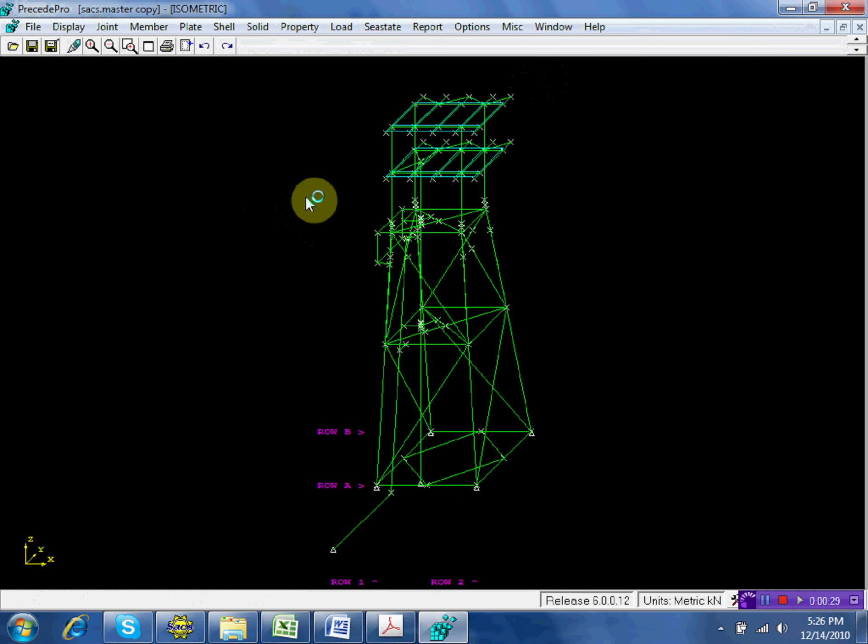So we will select. Go to display, go to select. Check disconnected joint, and check plates, and include in conductor only. We will show conductor only.

So we will add some additional loading. Press OK. So this is now the conductor. We will add a uniform load along its length.

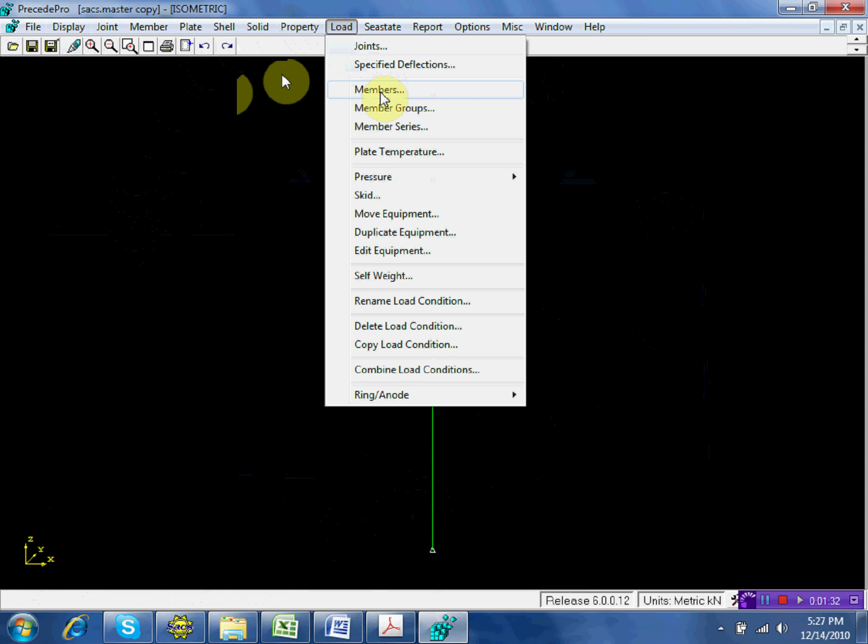Go to load, go to load, and members. Select this. Press Ctrl for a multiple selection. Select all for a multiple selection. Press apply.

This is part of jacket load miscellaneous, so scroll down and go to JCK. Conductor, go to load and then member. JCK, press OK, and then your load ID is grout.

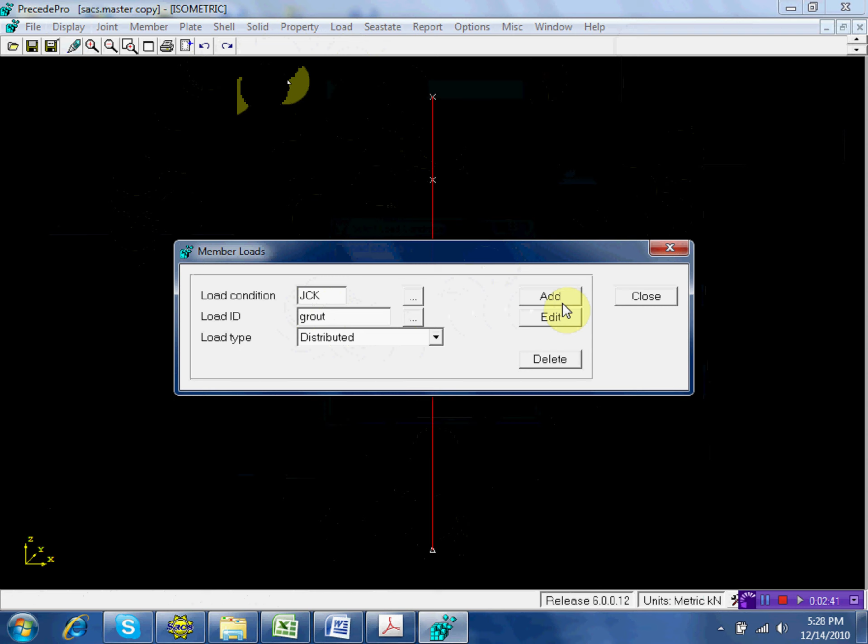Grouting or tubing, grout. Just put grout. JCK grout. Press add. And then my loading will be minus 10, assuming 10 kilonewton per meter.

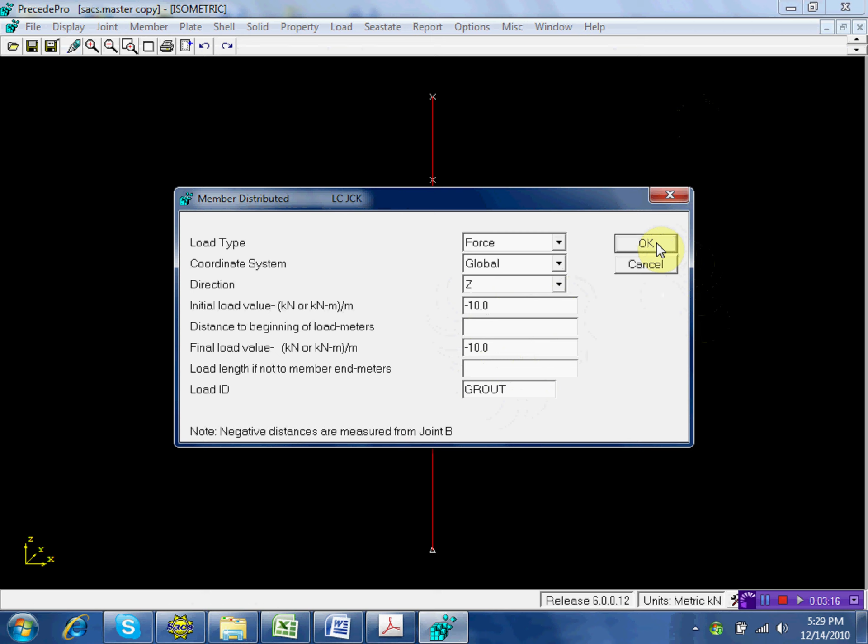So 1 ton, grout, and then 1 ton, almost 1 ton, more than 1 ton. So this is made up of grout plus the tubing. Press OK and it will look like this: uniform load downward. So you have 705 kilonewtons.

Save, press save. And then we will perform super element again, because we updated the loadings. Close the precede.

Yes, you should pay attention: distributed load, member load.

You have already the PSI run file, this one. You just double click this one, and it will go like this, same as yesterday. If we go to files, double click this, the PSI run. If you have the PSI run, double click, and it will look like this.

If you don't have it, you have to go to linear static with PSI and then run the analysis, select the member SACS model file and then the PSI file. If you have it, just double click the run file, and it will automatically go to the file.

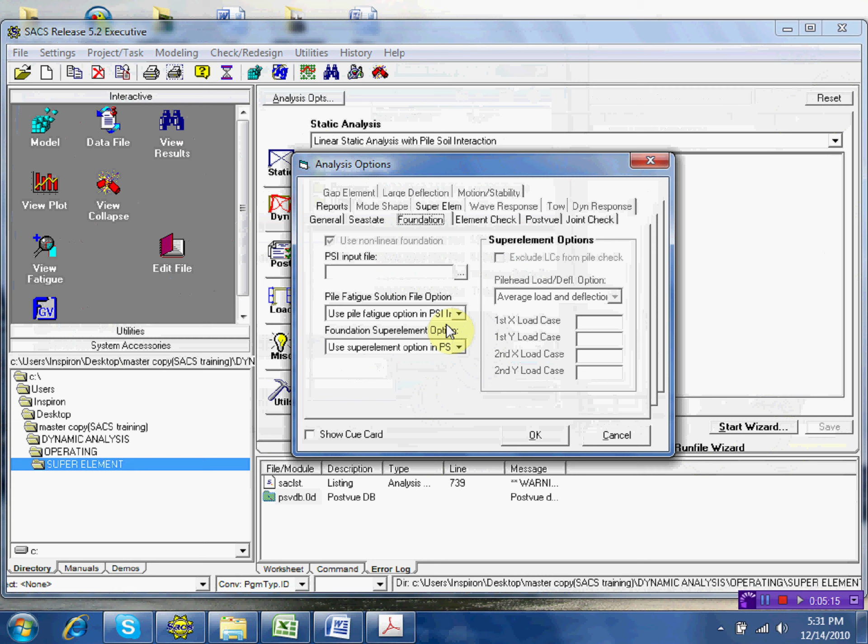Now, I don't need neutral picture files. I will keep this file, PCISI, keep this file. Right click, and then keep this file.

Now this is dynsef. Take note, we are at operating case. So right click this one and rename. I will rename this one as Oper, meaning operating case. Rename, right click, and then rename.

So run the analysis to extract or to get the dynamic super element. Now this one, dynsef, we need this one to perform modal analysis. Run.

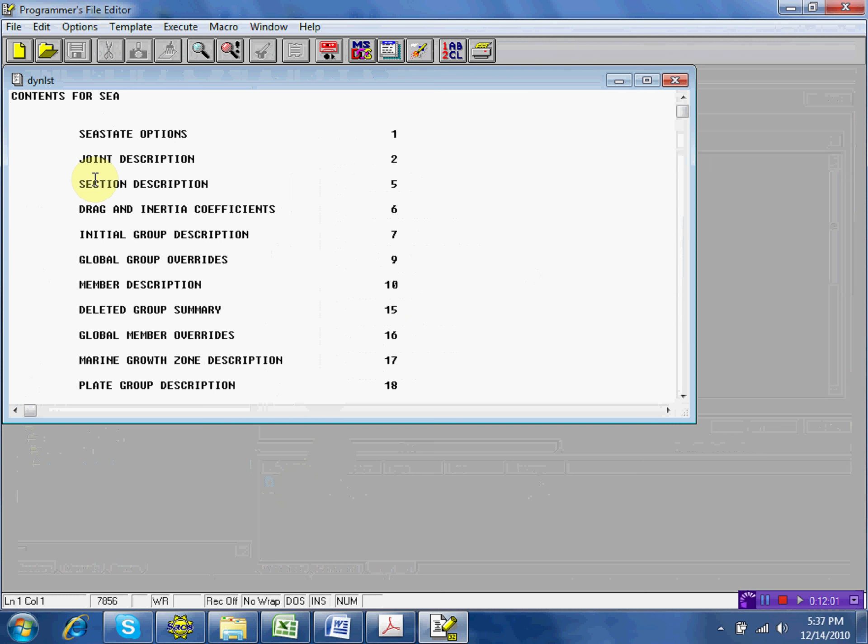Okay, I already sent to you the file, the file on how to compute dynamic amplification factor. Can you open it? Open this file. Open that file.

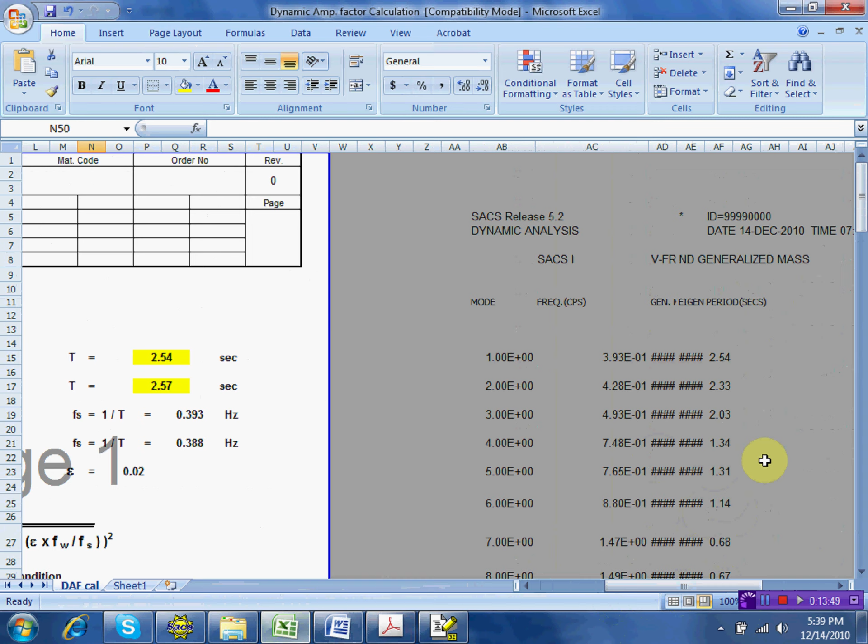Okay? Got already the file? Yes. Now, from here, this is operating, operating condition. So I will copy this. Copy, until here, until the 20th mode. Up to 20, up to 20 only.

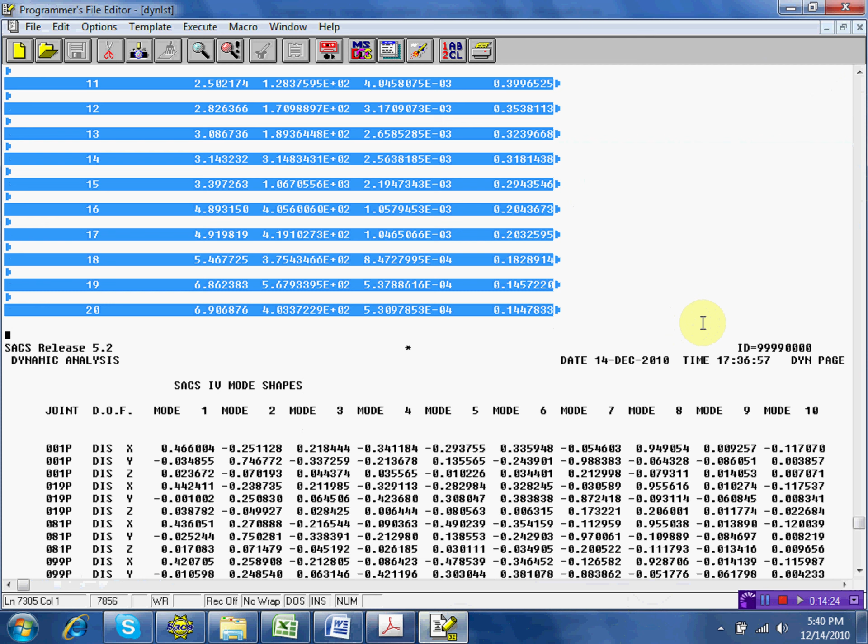Right click, copy, and go to this folder, this file, the computation. Okay, on the right side, put the cursor here, right click, and paste. So it will look like this.

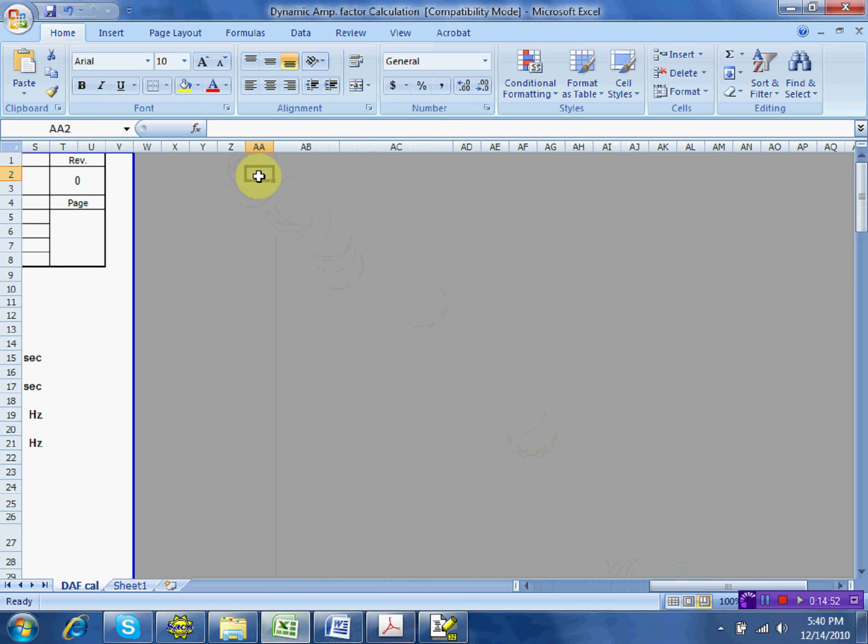Do not do anything yet. Okay? So you are already at this stage? Yes.

Go to data, and in the text to columns, select data, text to columns. So you will see this one.

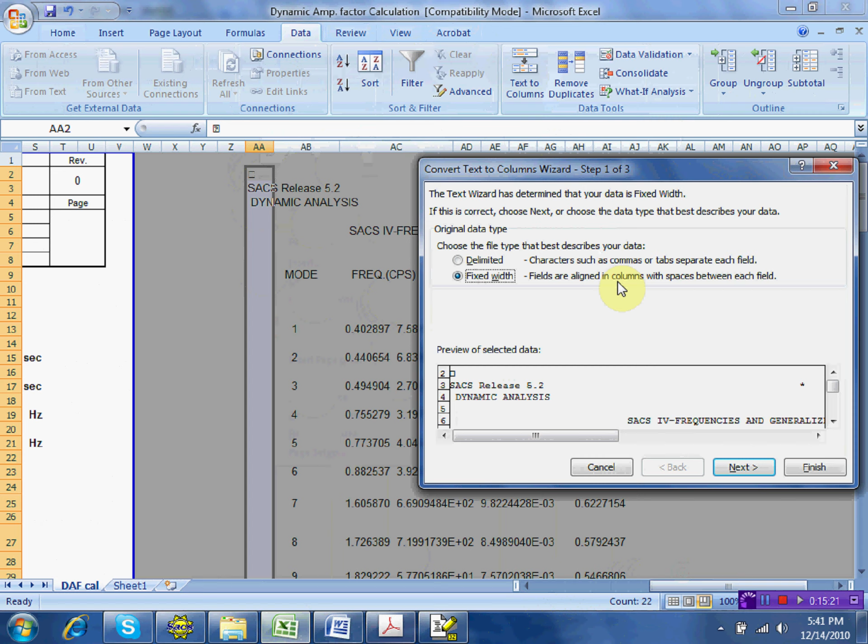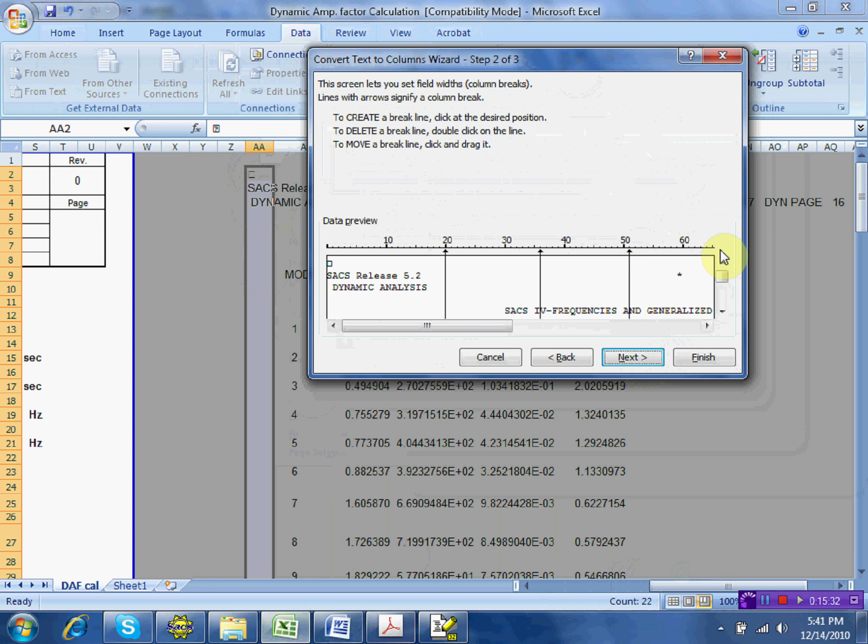Next, we need only the natural period at the first mode. Next, press next, next, and then finish. Oop. Undo. This is 2.48, 2.48.

Okay, so we have here the DAF calculation for in-place natural period of structure, operating, right? This is operating. Select only the first mode. So, equal to, on the first mode, how much? 2.48. So I have already 2.48. On the first mode, operating natural period is 2.48. So this is automatically calculated.

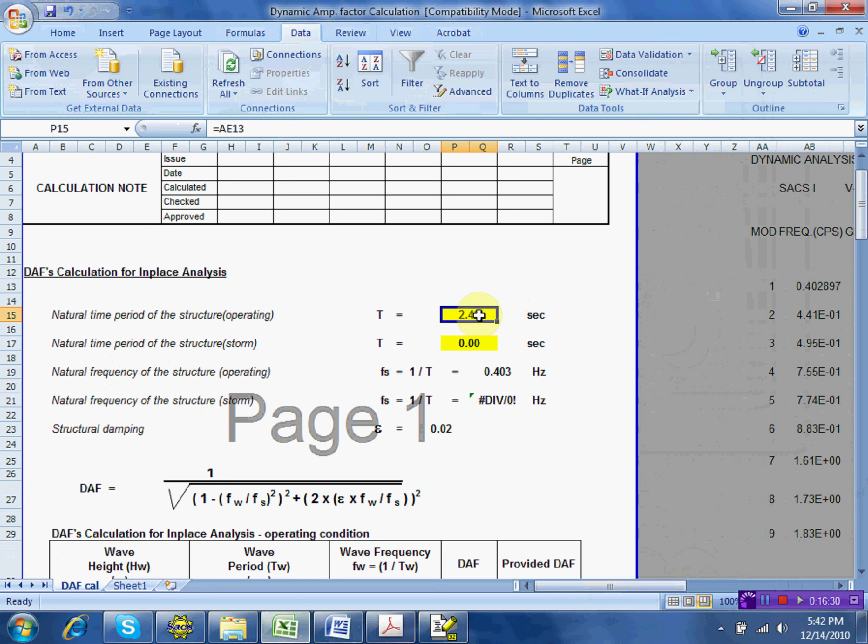So, in this, okay, we will discuss this wave height. The wave height is taken from wave period and height, operating, see? This is design basis. You see, wave height 2.4, wave period 5.7, right? Design basis. So that's why I put 2.4 and 5.7.

So this is from design basis: 5.7 T wave, 2.4 wave height, and then the DAF is 1.23. So from this equation, I've got 1.23 dynamic amplification factor. So we will use this DAF in-place analysis. So write this down, I will write down DAF in operating, 1.23. Okay, so this is the formula already calculated using this formula, DAF. This is what we call single degree of freedom DAF calculation.

Okay, what's next? Done with operating. The next one is storm condition. So, same procedure as what we did in operating. The difference only is your load case set, in the load case set. So we have already performed operating, so the dynamic amplification factor is 1.23.

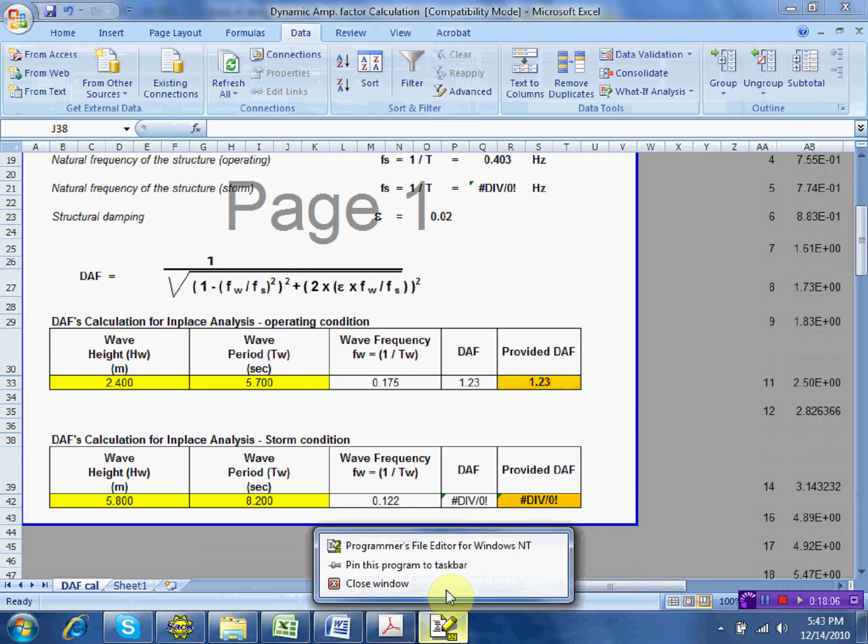We will perform now dynamic amplification factor calculation in storm condition. So, what we need is the natural period at storm condition. So, we'll calculate. Save that file. Save. Okay.

Okay, so we have already the DAF at operating condition. So, 2.48 natural period of structure. Now, we will go to extreme case.

Go to extreme case. So, we will make another folder, same as what we did in operating case. Okay? So, make another folders. In this case, I put all my files in master copy. So, in dynamic analysis, we will make another folder. In here, this is part of dynamic analysis now. So, I will make another folder. I will call this folder as extreme. Extreme, extreme case.

Okay? Extreme case. What is in the operating case, the input? Just copy it across in the extreme case. Okay? So, operating, I will make another super element. Then I will make also modal analysis. No? So this is under dynamic analysis.

So super element is to linearize the non-linear foundation. No? So you have to perform this one to linearize the foundation. Okay? So in this extreme case, I will make another folder. I will name this as super element creation, or super element. No?

Super element. I will copy across the file from operating to extreme. So super element, I will copy this, and of course the PSI. We have already this one. Copy the SACS model file and the PSI, and then the PSI.

Under dynamic, you check this as super element input in modal analysis. So in this case, super element creation, so this is okay now. But I have to hide 1,000 case. 1,000 case is operating, right? 1,000, 2,000, 3,000, 4,000 are extreme. So I will hide 1,000 now.

And I will unhide 3,000. You are not wondering why I didn't choose 2,000 instead of 1,000. Now take note, 1,000 and 2,000 series are operating. 3,000 and 4,000 series are extreme. So in this case, we are at extreme, so that's why I put 3,000.

The question, why didn't I use maximum water depth instead of minimum? Because natural period is usually a function of base shear. Base shear maximum will occur at minimum water depth. So always use the minimum water depth. That's why series 3000 is minimum water depth, that's why I select 3000.

So it's okay now, you look at it with extreme condition. So minimum water depth is 3000, 1, 2, 3, 4, 5, and so on and so forth. Save this file.

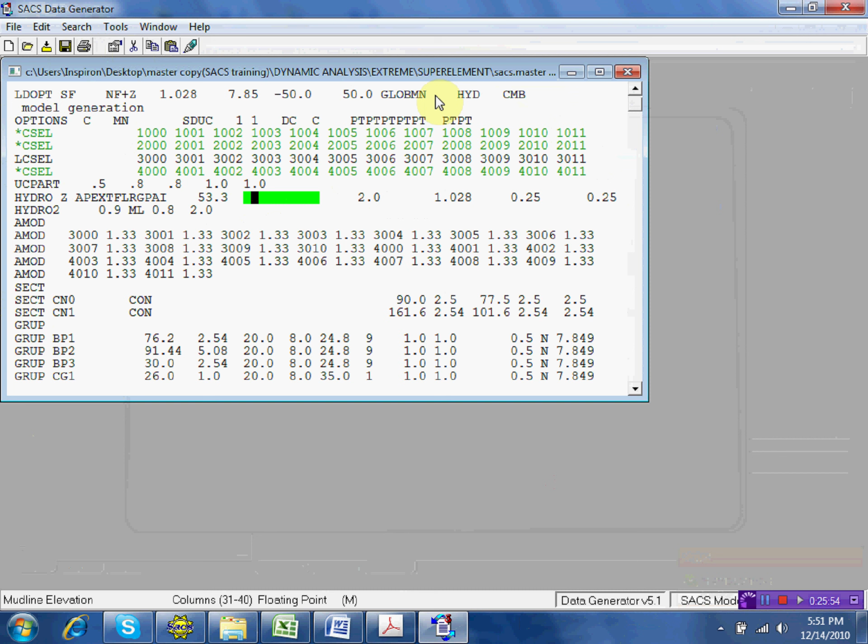And then run the wizard. So run the wizard with PSI. So this is under extract mode, so you have to reset and go to static analysis with PSI. Static analysis with PSI, okay, so start wizard.

Now the file name is SACS-INP, but we didn't name it as SACS-INP, so you go scroll down. Select all files, so that's SACS master copy. If your name is SACS-INP, automatically it will pop up, but since our file name is master copy, then it will not pop up. So you have to select all files. Okay, select this, open, and select the PSI input file. Okay, select this.

Okay, so you have the model files and the PSI file. Press OK. Now, in the PSI input file, we will update this one. We will modify this one because the original loading is operating, so I will change this one.

Go to data file in the PSI input. We have already performed the PSI input, with consideration of the scour effect, so degraded soil. In the file super element, you select the load in the model file. Can you still remember that file? 3000 series, right? So I will change from 1000.

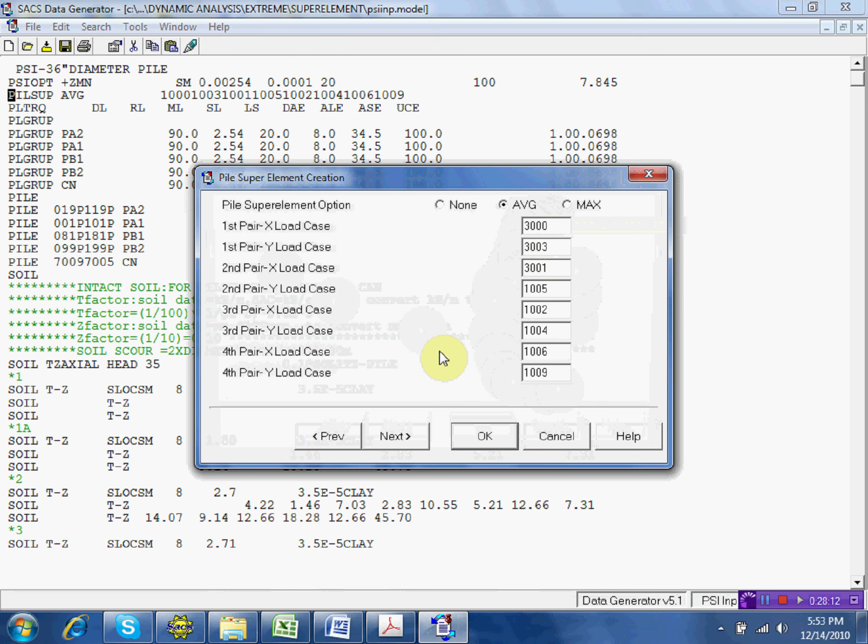I will just make this 3000. 3003, 3001. But take note, we have this like this, huh? The angle of attack should be X and then perpendicular. X perpendicular, X perpendicular. So 1000 as to 1003, see? 3000 as to 3003, 3001 as to 3005, and that side. So just change this to 3000, 3000, 3000, 3000, 3000.

First pair X load, 0. The first Y load should be 90 degrees to that. So if I will attack here on the diagonal, it should be perpendicular. The first Y. So usually very important is 0, 90. Base shear, base shear. So 0, 90, 180, but you will include also some part diagonal to the jacket structure. Okay?

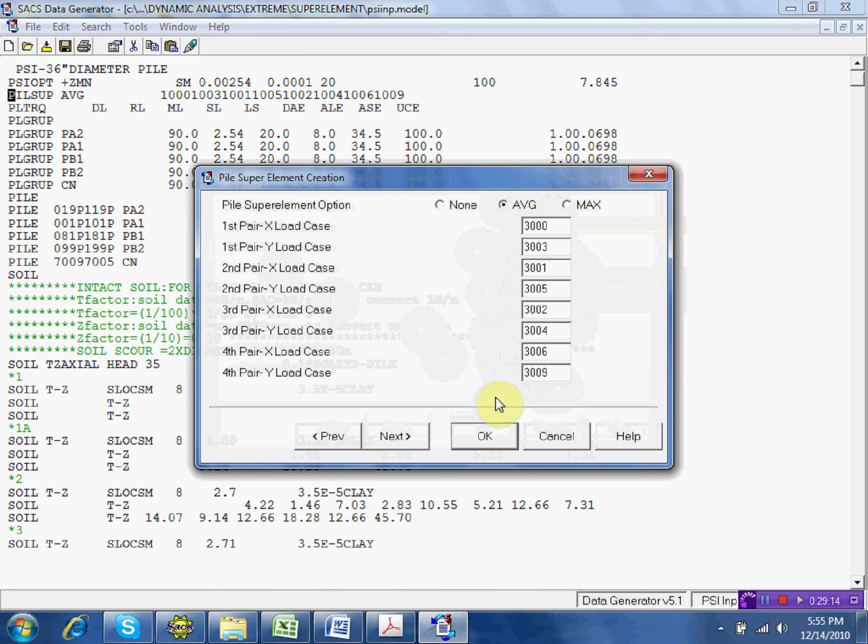Press OK now, and run the analysis. Run the analysis. So save the file. I will rename this as dynamic super element. Right click this and put rename.

Put extreme. Extreme, extreme. Super element at extreme case. First is operating, the second is extreme. Now, I don't need neutral picture file. We don't need this one, right? We need only extreme, so I will hide this one. So hide this file.

Keep this file. Right click and then hide this file. This is to avoid too many files. Those unwanted, you don't need to show. Okay? So extreme case, DYNSEF super element is required to linearize foundation in order for you to perform dynamic or modal analysis. Run the...

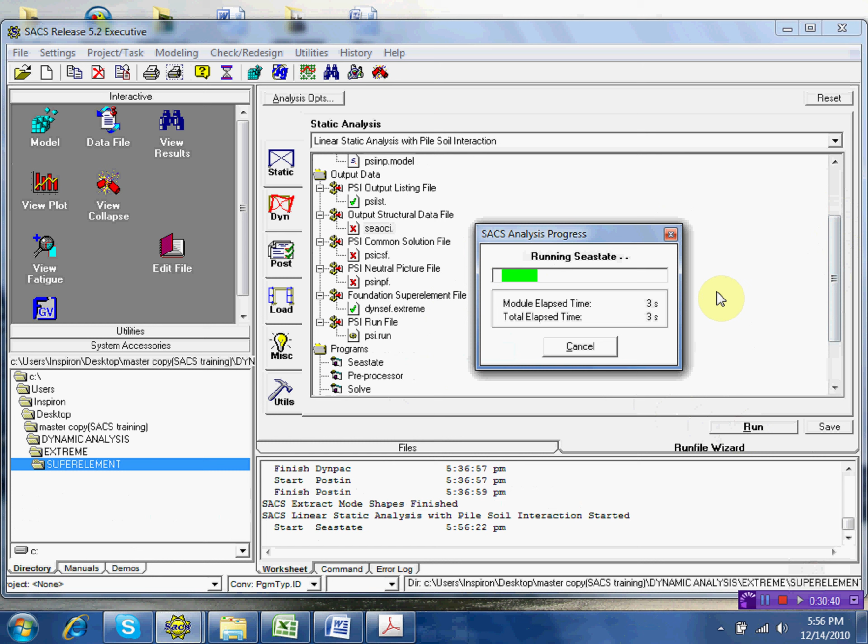Okay, so check. No errors found, so the file is not corrupt. So this is okay. Next will be the modal analysis. After the creation of the super element, you can perform now modal analysis. So this is very important. This is to remind you. We have already this. Thank you.

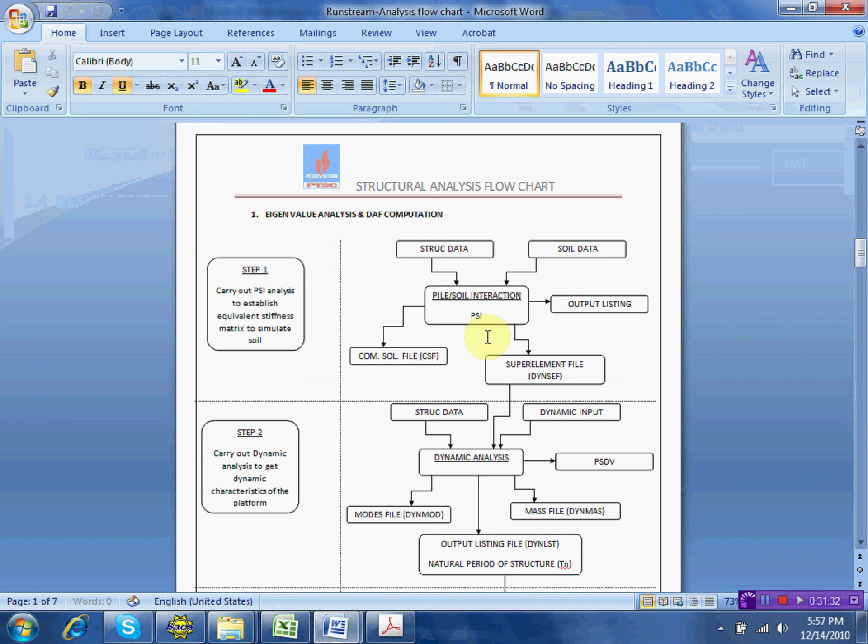Run stream. Yeah, I already sent this file to you. In order for you to not forget, you have to use this one. See? Eigen value analysis and DAF computation. The first step is this. Remember this first step? We have structural data, we have soil data, we perform PSI, and then now we have the super element, right? DYNSEF. After the DYNSEF creation, perform dynamic analysis, modal.

So structural data still needed, dynamic input is needed, so we have already put this one. And DYNSEF is an input in dynamic analysis. So you need super element in order for you to perform dynamic analysis. Same procedure as what we did in operating case. Okay, so I will perform now analysis. Go to modal, under extreme, go to modal analysis.

Okay, this one. Take note, you have to add. So you notice, you have to add a joint. You have to modify a joint. You put 22200 DOF at main jacket nodes. So this one, 222, 22200, 22200.

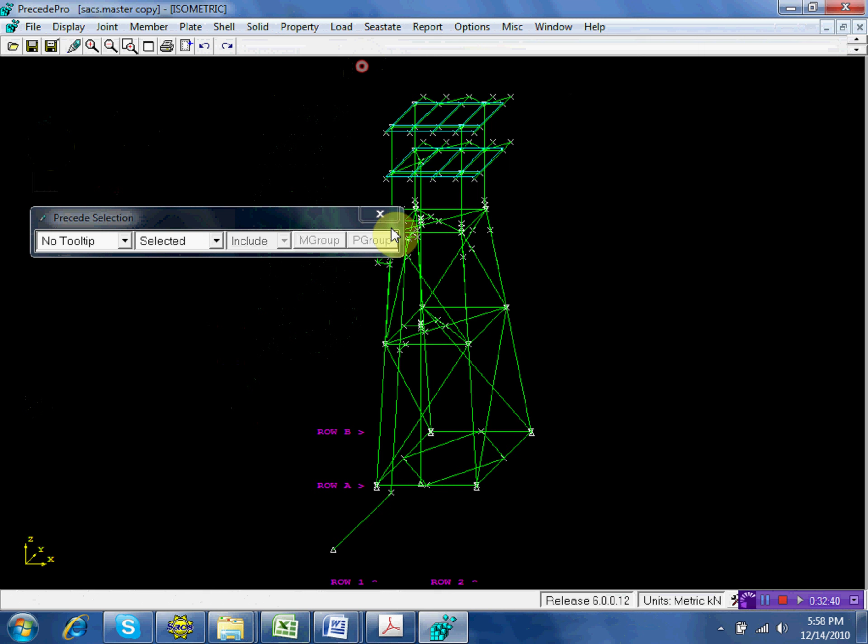In here, the retained degrees of freedom, usually at the jacket main legs and top side. So you notice I put top side here, top side, top side, top side. Another on the top side, top side, top side. So that's the only modification from the in-place analysis.

So you have to select the input. So all files. Copy, open, and then Dynpac input. Are you following? Okay, all files. So Dynpac input files. Open. But do not run the analysis yet.

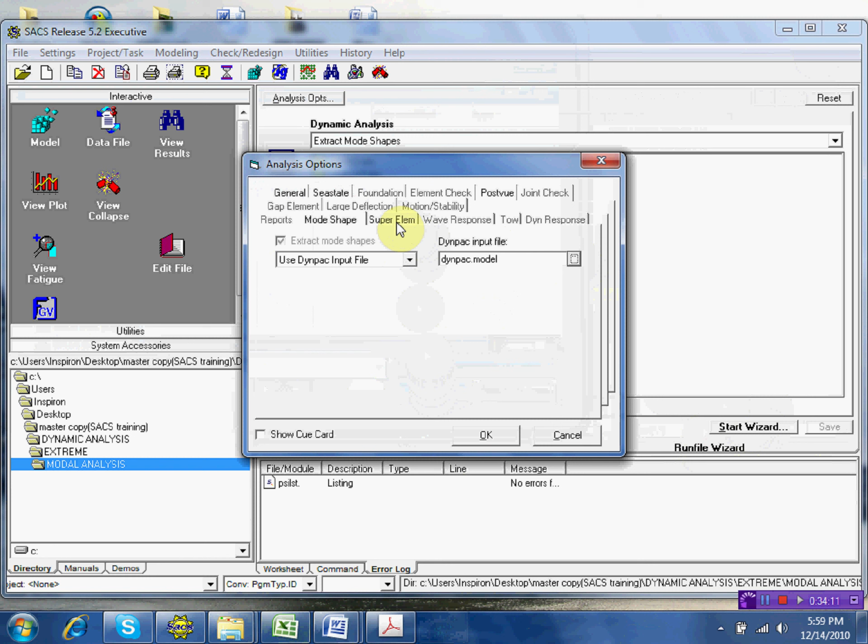You have to select super element. So in this case, you have model, default, import super element, no super element. So use import super element. Okay, you have to select import super element and select this one, the super element file on the extreme, the first. You remember we perform super element creation, you select that one. So in this case, I have that in this dynamic analysis, extreme, and then super element. So this one, extreme, remember this one? So we have already created this one, linearizing the foundation. Open.

Extreme. The first step we have: import super element, super element in extreme case.

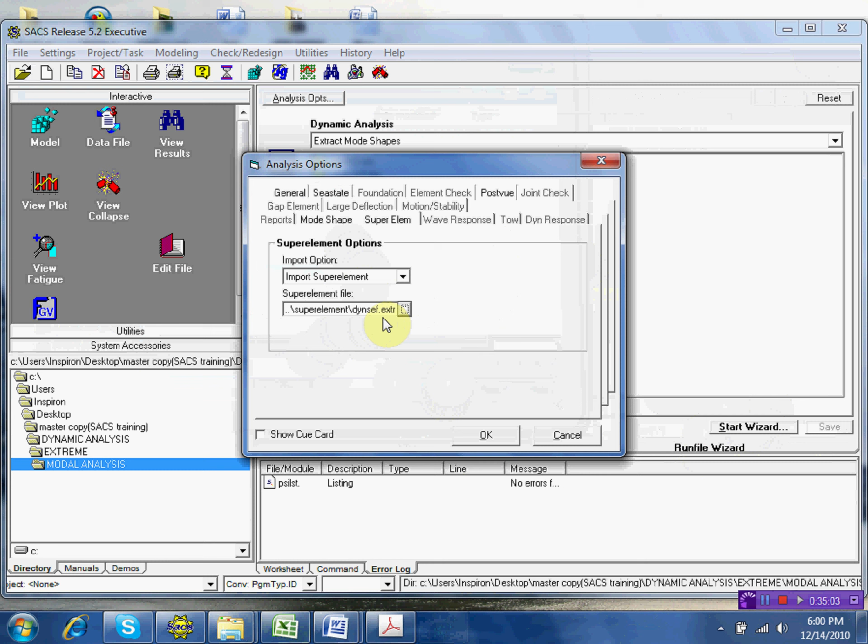Then I will select Postvue to see. It is very important when you perform any analysis, you have to go to Postvue to check any anomalies. For example, if the beam is not properly connected, it will deflect like that. So always double check the Postvue. No anomalies, no errors. Press okay.

Now double check the input. The only difference in operating and extreme cases are the loads in the model. I will check this one. Go to data file. So this is okay, right? So you should put input, no? Select input and unselect the super element creation. Super element input now because you are in the modal analysis. It becomes I, na? This.

And select the loads to be converted into mass because natural period of the structure is a function of mass. The heavier the platform is, the higher your natural period. So they have dynamic, and the load factor. We already discussed this one yesterday. So this is the same. Extreme, operating, same load.

Dynamic, and then the factor: live load is 0.5 and dynamic 1.1 for deck, jacket, miscellaneous weight, piping, equipment, and miscellaneous. So these factors here are taken from in-place operating case. Notice this one, these factors? These 0.5 and 1.1 are from in-place analysis. So this is taken from in-place, eh?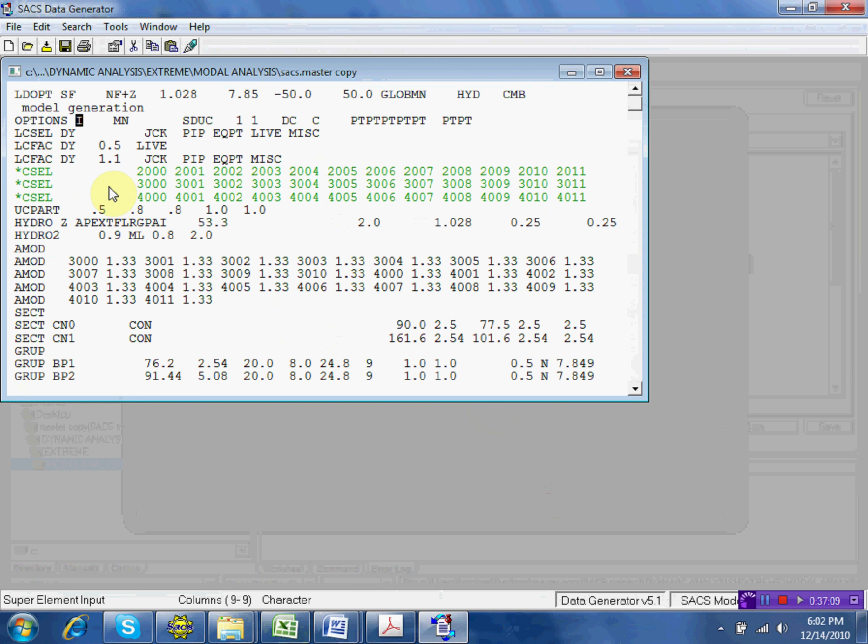Okay, so we will perform now modal extraction. We have the super element, we have Dynpac, so check the Dynpac input file.

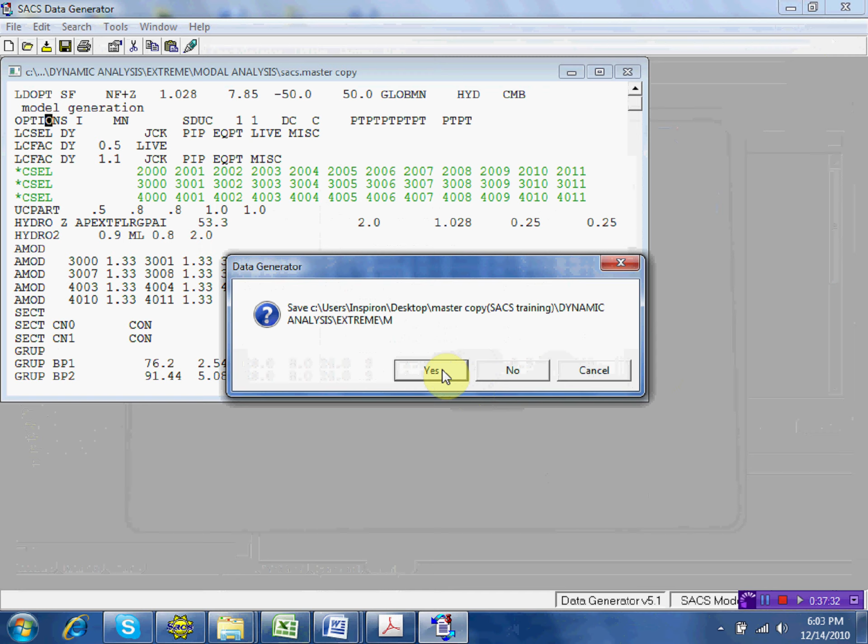Okay, so this is okay. Now, when it will not converge, for example the cumulative factors is less than 90%, you increase the natural modes. I already discussed this one yesterday. If still below 90, you add 222 additional, no? Additional, so 20. So I choose 20. Perform now the analysis.

Yes, you have to run. Run the analysis. Extreme. Okay, so no errors found. And on the Postvue, display, shape, animation, maximum. I will choose 200, the number of steps.

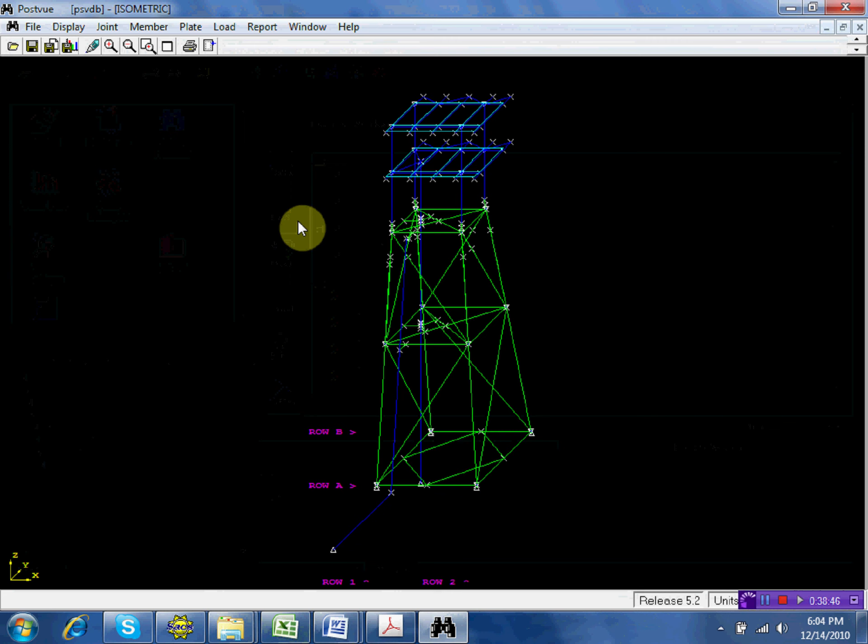Okay, so this is now the natural period of the structure at extreme case, 2.512. So how much you got? Yes, same, of course. Maybe you don't display, no display. Maybe on your screen you have the settings. You got problem with the settings.

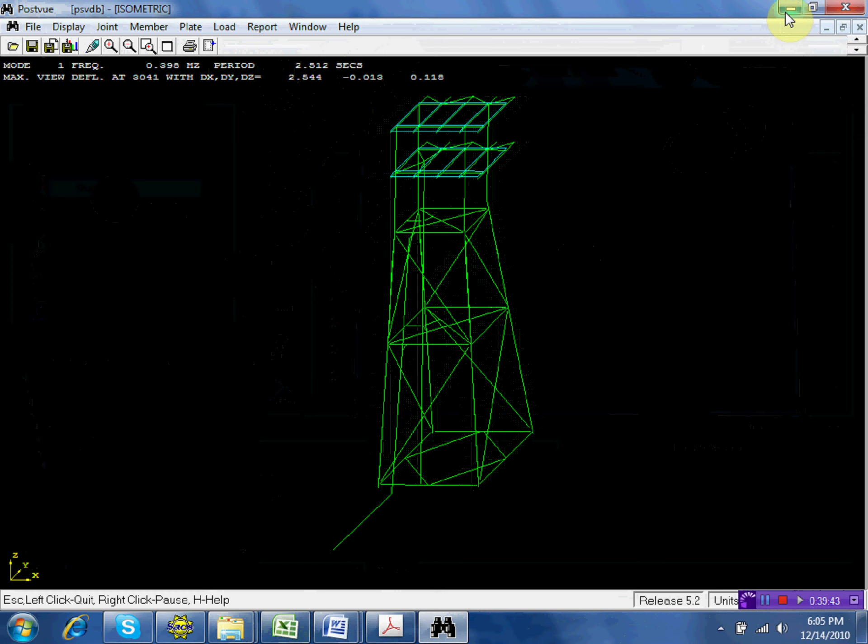Okay, so we have already now the natural period, no? But take note, in every modal analysis, you always check this parameter, the degree, the RDOF cumulative factors. So go to the list first, double click, edit, find, the frequency. So I had here 2.512, but always double check this.

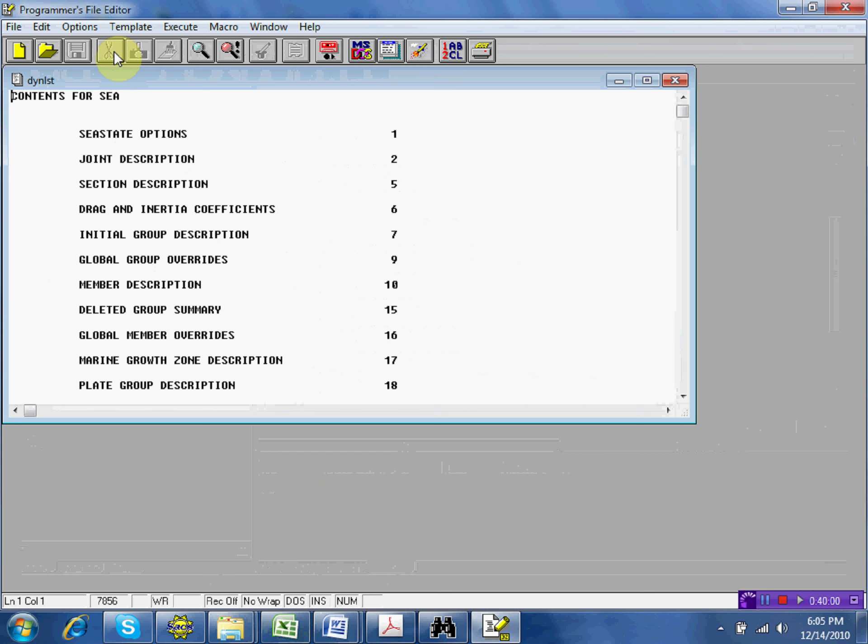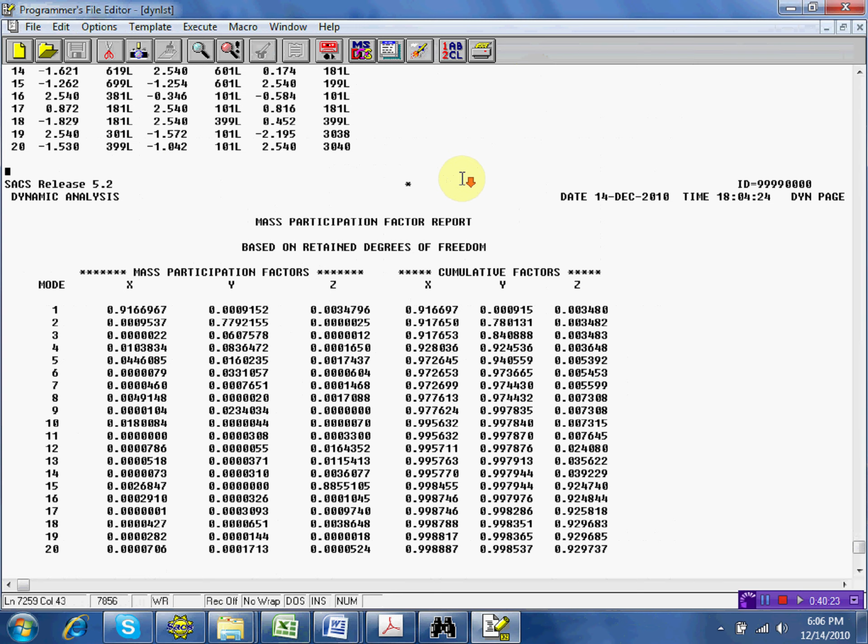Mass participation factor should not be less than 90%. Here, see? Part of the report will always show these parameters, the effective weight, X, Y, and Z. See? At the last mode, we have participation cumulative factor of 99%, 99%, 92%. So that's greater than 90. Our analysis is okay, so that's very important. Usually modal analysis, this part here will be attached in the report.

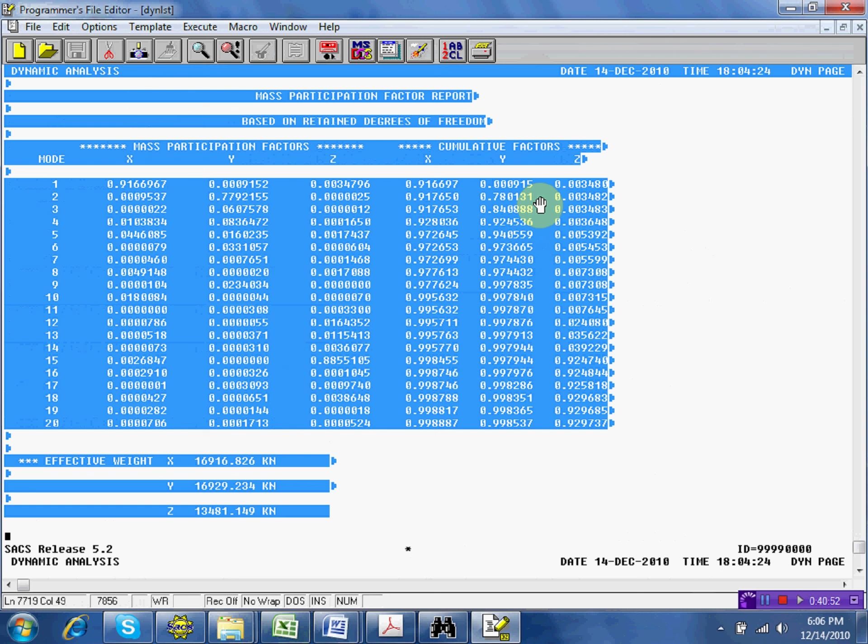What will happen, for example, this value, usually this Z, no? This Z is less than 90. What will you do? Technique: increase the number of modes. You can perform 100. If it will not reach 90, you will add 222 in here, additional. You put at the X, you put here at the X, add on the main nodes. So that's the technique. If it's 90, no need to add. It's okay, no? At 20, it's okay.

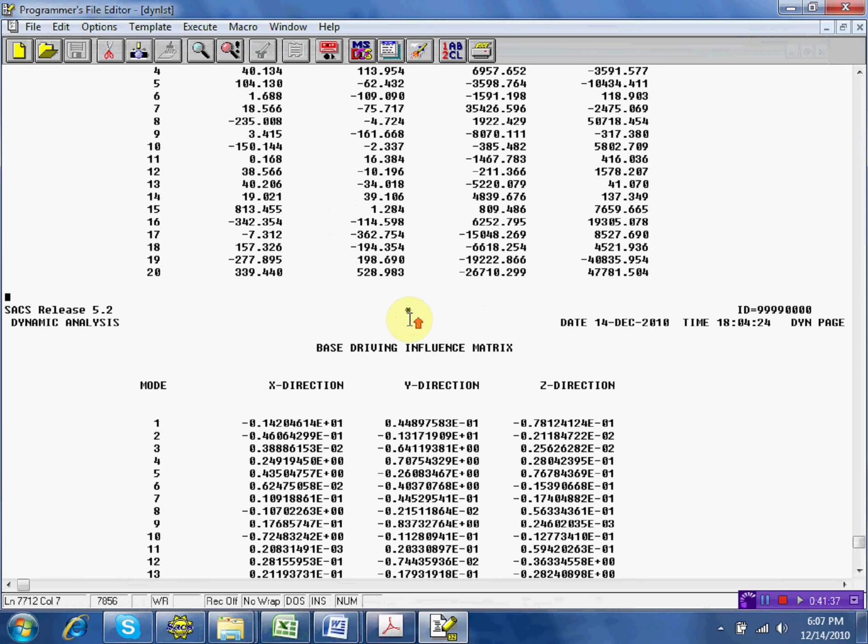Okay, so I will copy my natural period here, to be used in in-place analysis, na? Right click, copy. So 2.515, and go to the DAF calculation, the first, and put the file here. Right click, and paste. And then go to data, and then text to column, in order for this file from SACS to be usable in Excel.

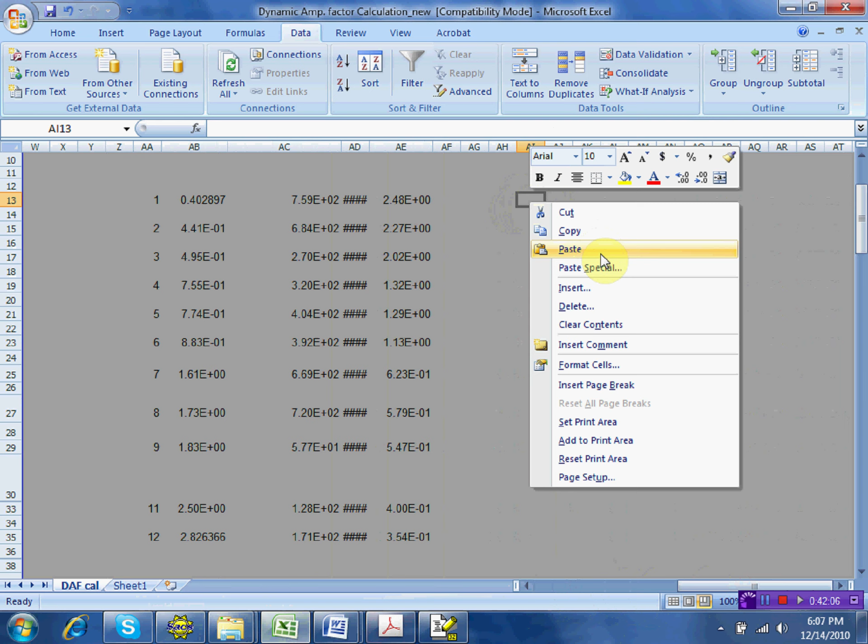Take note, this procedure we will use in computing inertial load set and in computing lateral loads due to earthquake. So go to next. Finish. 2.51, so this one, this is the natural period.

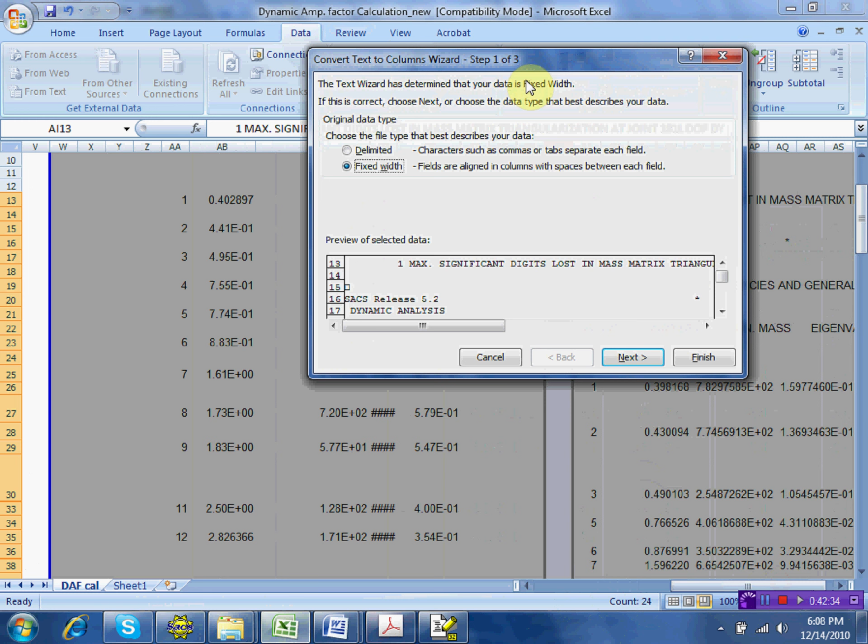So natural period of structure in storm case. I will select that natural period. Always use the first mode, which is this one, the first mode. So 2.51 for storm and 2.48 for operating case. I think it's quite reasonable for this natural period. If the water depth is too high, most probably higher.

From design basis, the wave height and wave period. So for storm it's 8.2. We have the design basis: storm case, wave height 5.8 and wave period 8.2. That's why I put 8.2 here. Using this formula, single degree of freedom, because the natural period is less than 3. So I'm using single degree of freedom. As a recap, operating condition DAF of 1.23, storm condition 1.1.

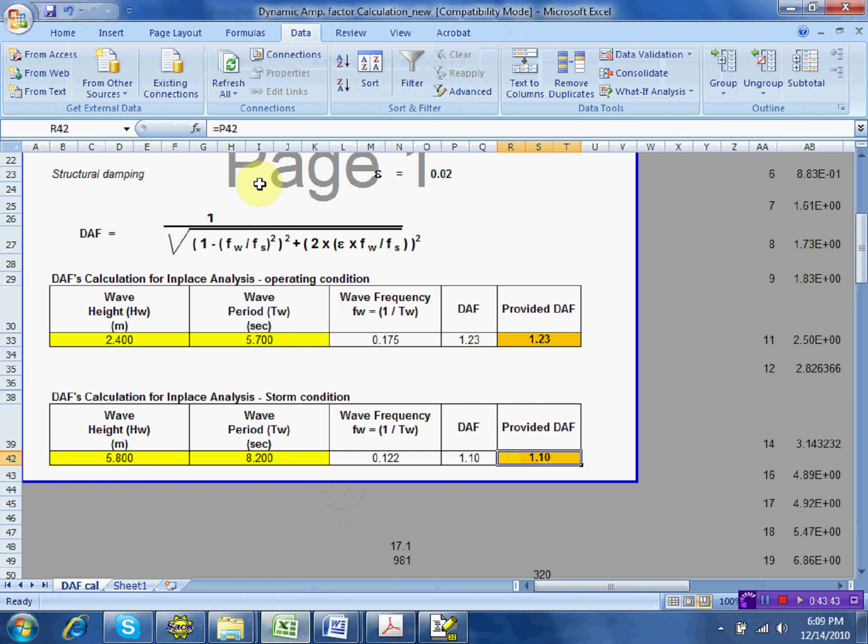We will apply this dynamic amplification factor in our in-place loading, and it's already complete. We have the DAF: 1.23 in operating and 1.1 in extreme case. So 1.23 for operating and 1.1 for extreme case.

Close the file. Make another folder. You will make another folder, name it in-place analysis. In case I have already the file, name it in-place analysis.

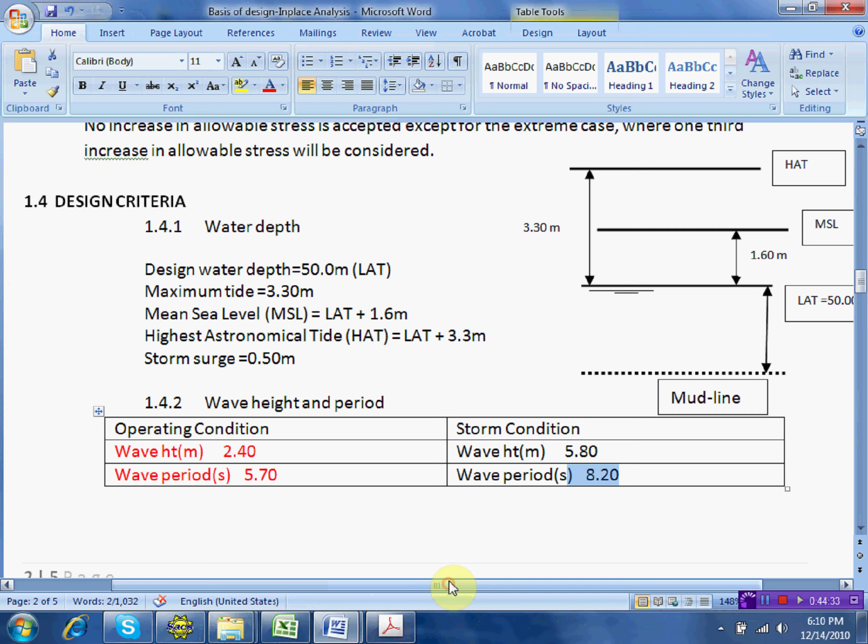The first one is dynamic. In dynamic you have operating and storm. Now is the in-place proper, so make a folder. I will not emphasize how to make a folder. Make a folder and then separate operating case, extreme case.

Okay, I will delete this one for a while. Okay, I will make a folder here. I will name this as in-place analysis.

You have already the in-place analysis folder. Inside that folder, I will put another subfolder and name it operating. You have to separate the operating case and extreme case: operating case loading and this one extreme.

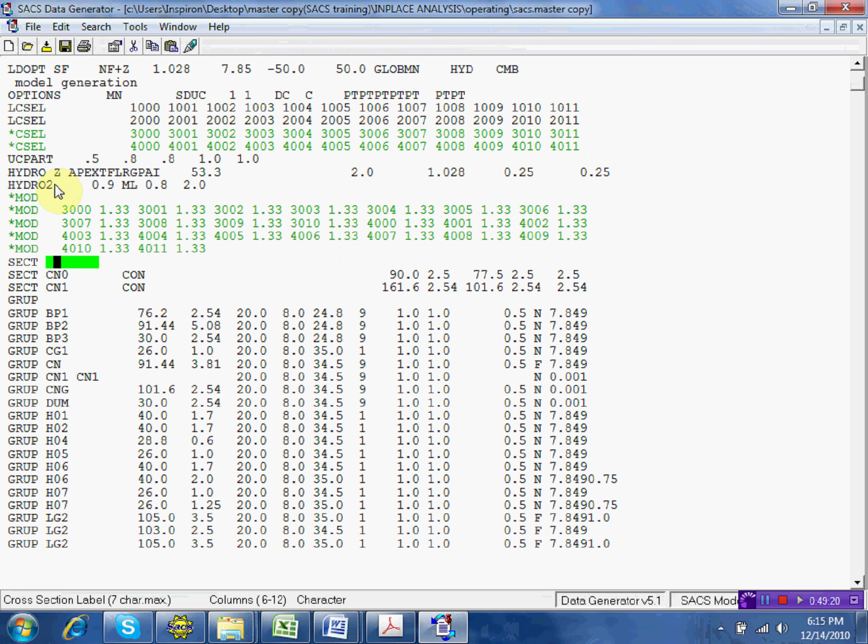There are two methods in applying DAF in the input. One is this - you notice the kinematic factor is 0.95, right? That's in our design basis. To include DAF, you multiply this by DAF. So 0.95 times DAF of how much under operating? 1.23. That will be your new kinematic factor.

Why? What is the reason why I multiply it in the wave cards? Because dynamic will be a result of sinusoidal wave. So wave is part of dynamic. Current is not, so you don't apply your DAF on the current cards.

That's one method. Another is this: in order for me to check the loads created by DAF, I will just simply copy this one. So this is another method. The first one is multiplying the kinematics by the DAF, but in that case I cannot determine how much is the loading created. And sometimes client will ask, how much is your loading? So we cannot say this is how much because we just multiply here.

Maximum water depth also. So that's why if we will consider minimum water depth, maximum water depth in operating extreme, you have that case, a complete case. This is okay when no rig loads. But if you have rig loads, if you have the location of rig in this well, so you have minimum water depth, maximum water depth, extreme case. So you have so many combinations. That's why, in order to avoid minimum water depth, maximum water depth, you have to perform wave search analysis. So you have only one. It depends on maximum shear and maximum bending moment, or maximum moment. So in this case, we will do it one by one, no problem, let SACS do it.

So again, 200 case, copy, paste. 300A, DAF. 301. 301A.

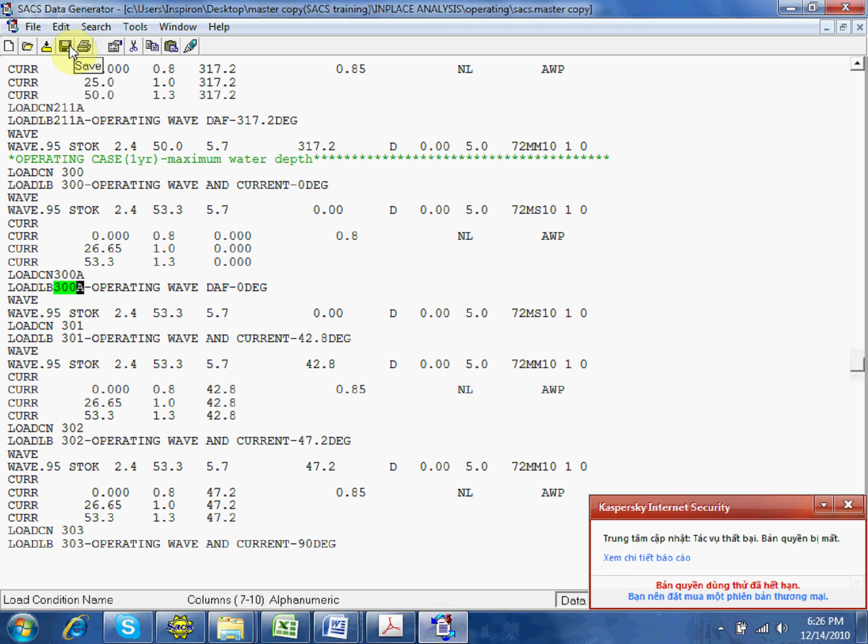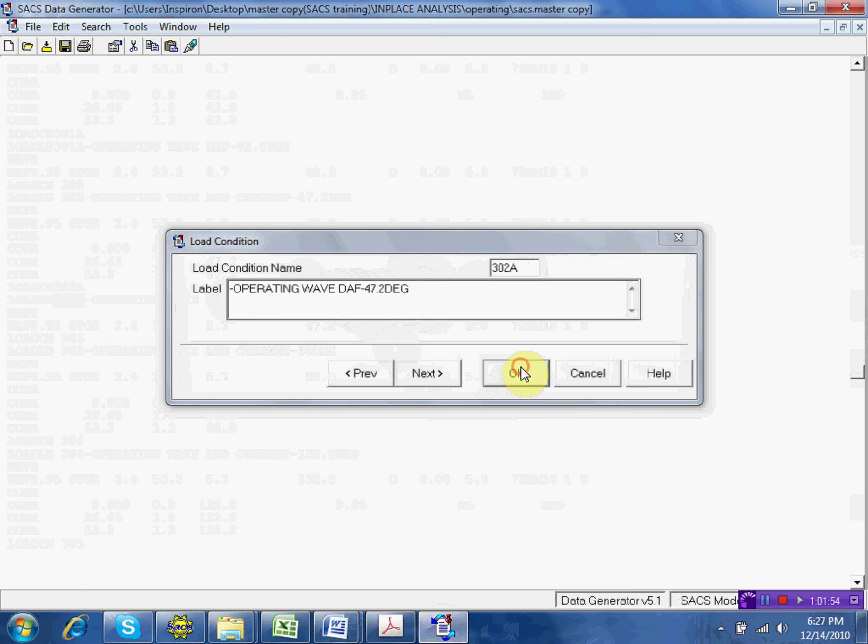302. 303. 304. Take note, 304. The corresponding DAF is 304A, because we will use that one in the load combination.

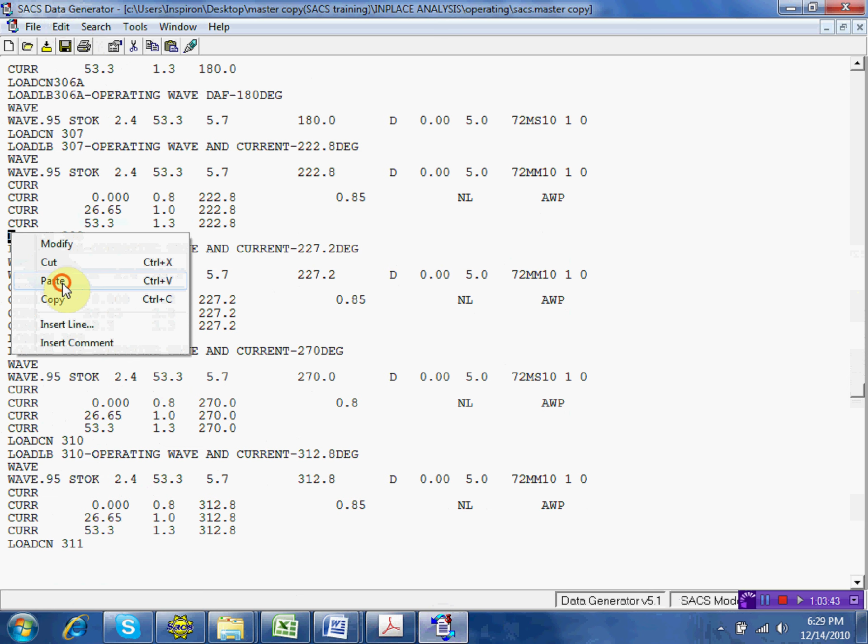305A, DAF. 307. 308. 306. Duplication in 308.

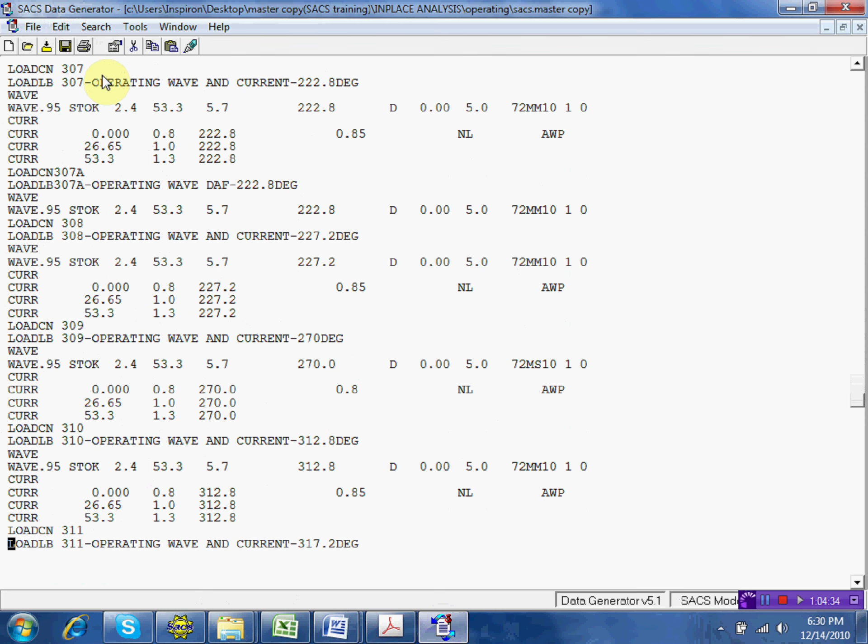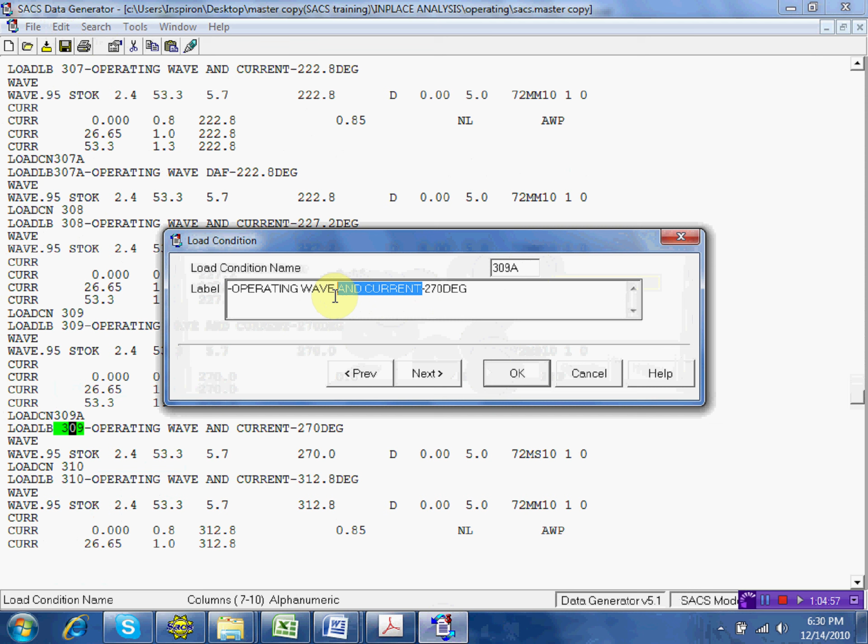Done already? Sometimes it takes like that. I don't understand this. You already at 308? Okay, not yet, no.

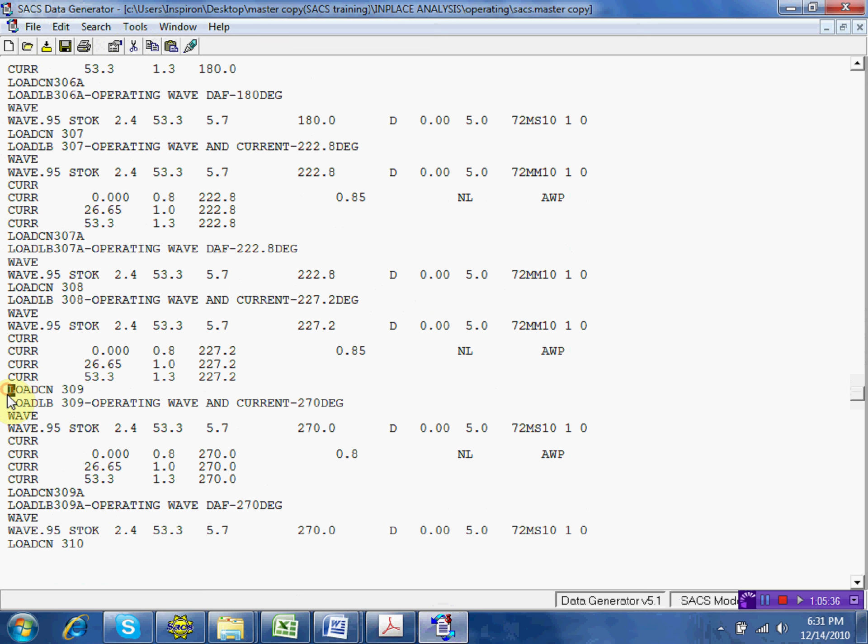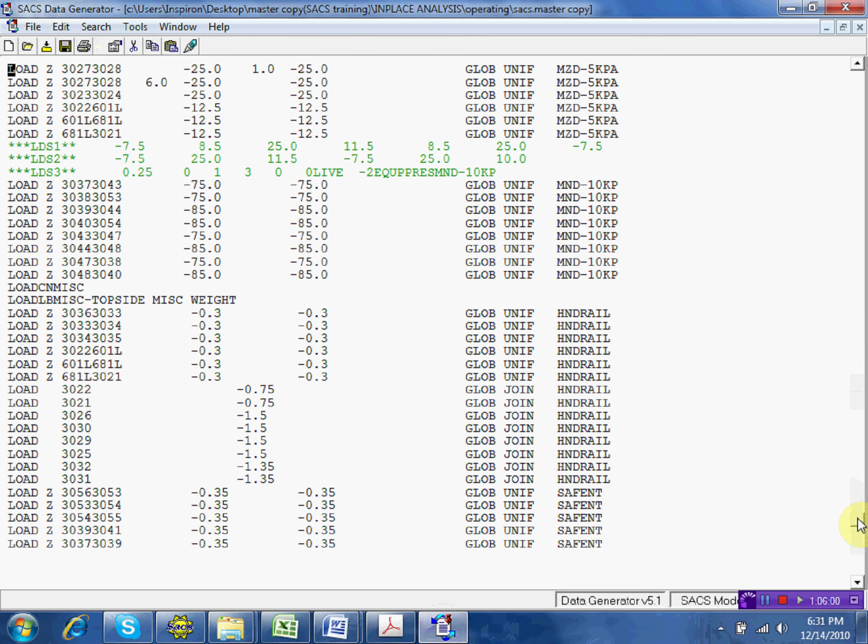So as a recap, this is dead weight, wave at 0 degree plus current, and wind along 0, right? But this loading here doesn't involve the dynamic amplification factor due to wave. So we will input in here as a load case. I will double click this one. Oh sorry, it's already an error. You can check it in here. Sometimes like that, try to avoid, no?

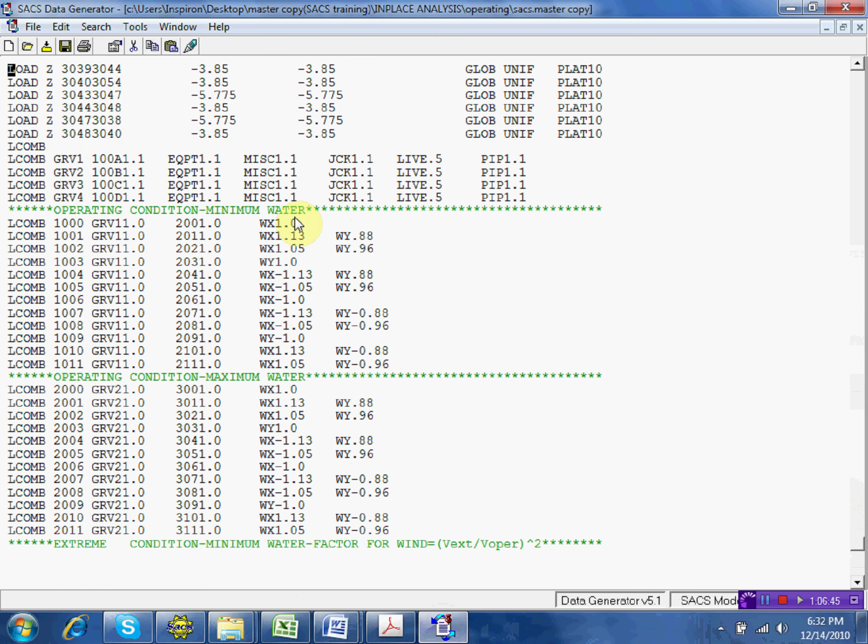2008. Okay, so we will add another load case due to that, right?

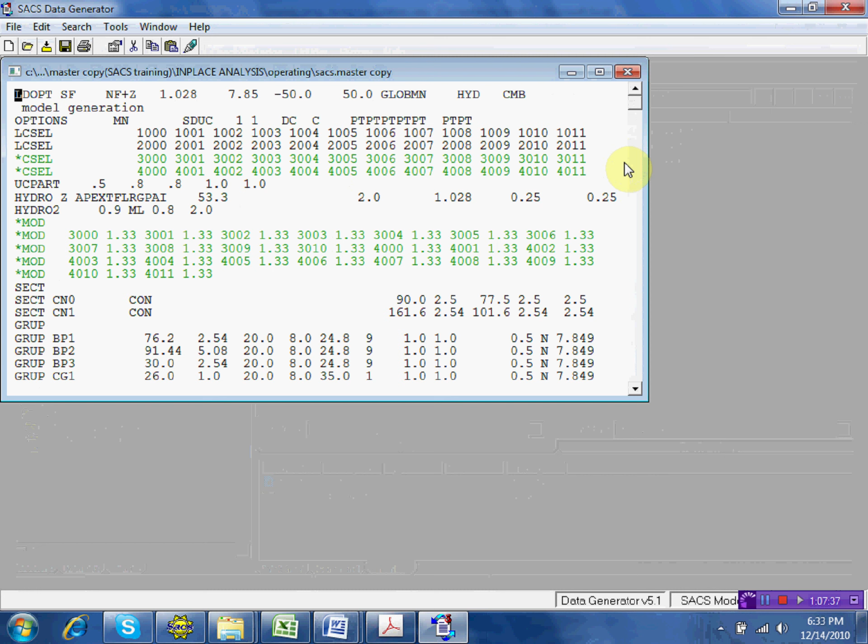So in order to add dynamic factors here, you double click this one, and then add for 200, that is 200A. And what will be your factor? See, your factor is not 1.23 but 0.23 only, because it's already defined, the 1.0, 100%, right? Your DAF is not full 1.23 but 0.23 only. So your factor here will be 0.23. You follow? Yes.

200A. Next, this is 201. Our load is 201A. The factor is 0.23. Current, because due to sinusoidal, the structure will react due to wave only. Okay, that's why it's like this.

202A, 0.23. 203A, 0.23. 204A, 0.23. So same, na?

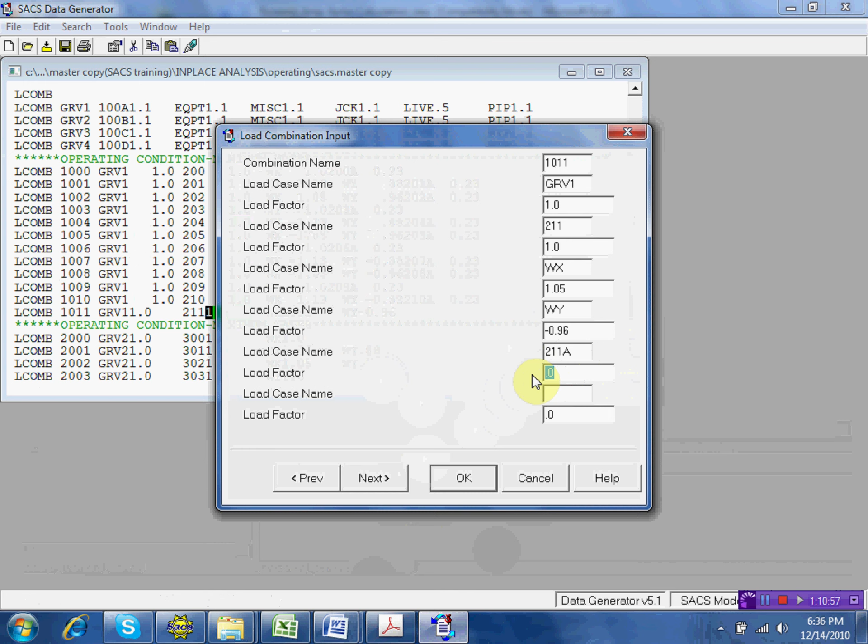301, 301A, 0.23. 302A, 0.23 also. 303A, 0.23. 304A, 305.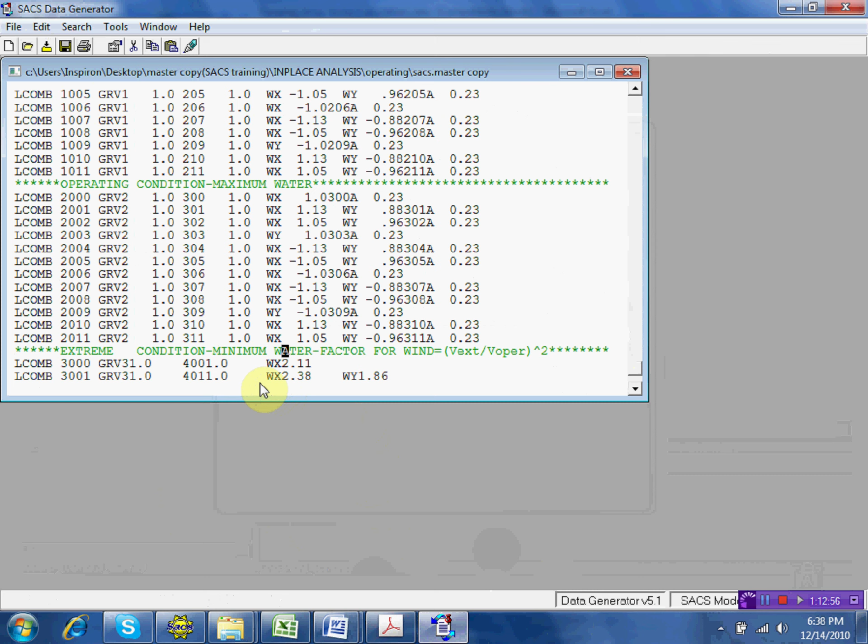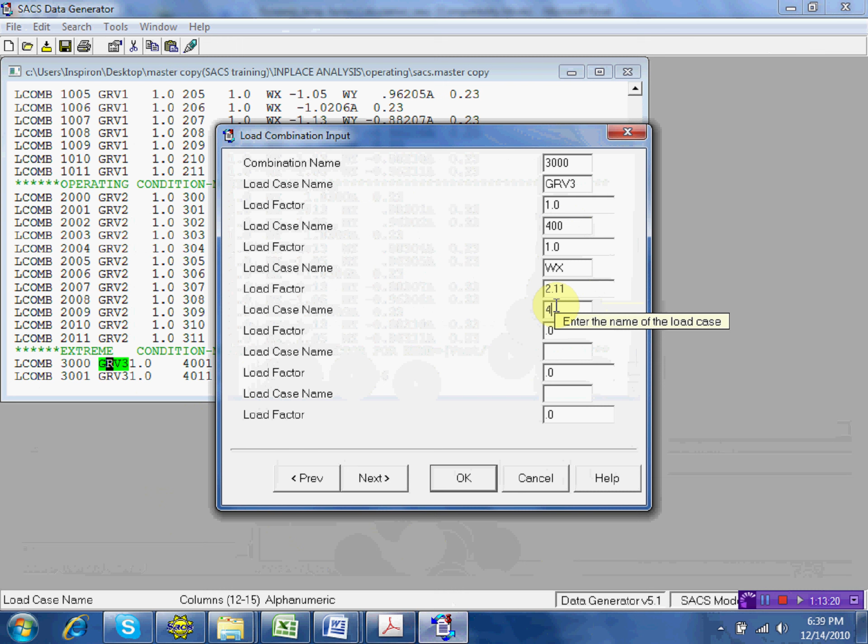400, so most probably your load condition in DAF is 400A. And your factor is how much? 0.1. So 0.1. Na? 401A, 0.1. 402A, 0.1. 403A, 0.1.

Finish that. 403A up to 500A, 0.1, 501A, 0.1, 502.

So this one, 404A, 0.1, 405A, this is just only the beginning. We still have the fatigue analysis, too many files.

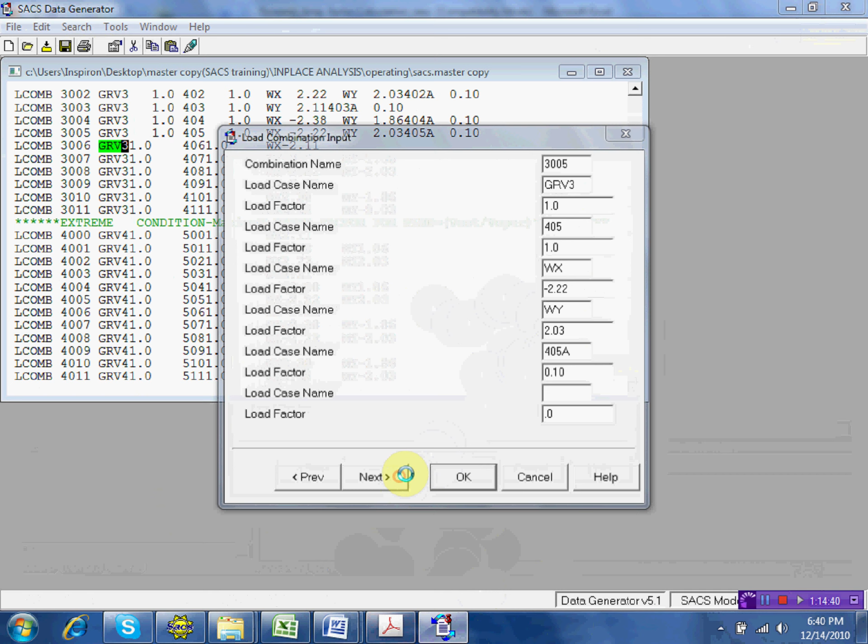So it really needs time, no? Time, and usually to avoid forgetting, you need the run file, na? See, it's very important. See, the natural period.

So DAF calculation is this, and then you can now start the in-place analysis. Seastate model file, soil data file, joint can input. So in here, you have already the DAF. So that's the analysis. In-place analysis, seastate or the model input, soil data, joint can input. And in the model file, you have already the DAF.

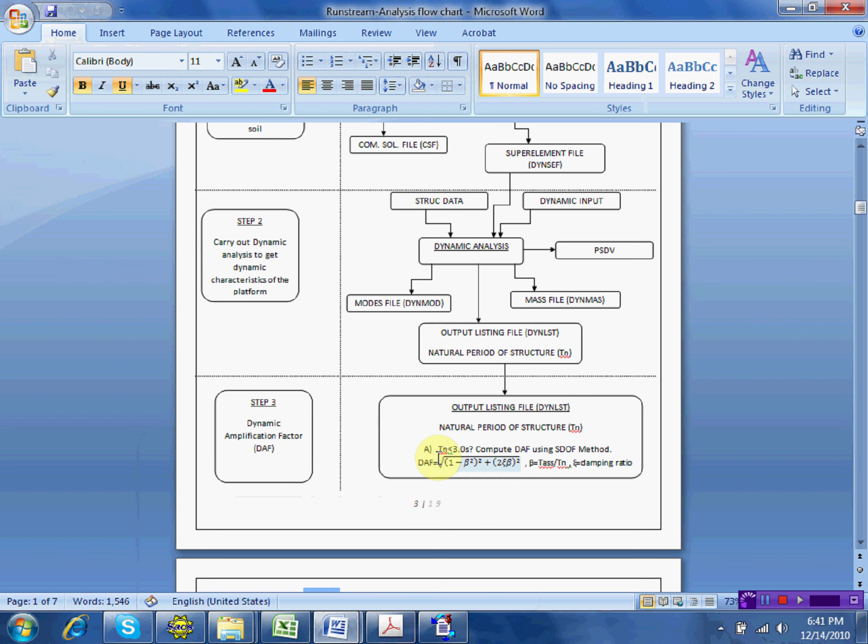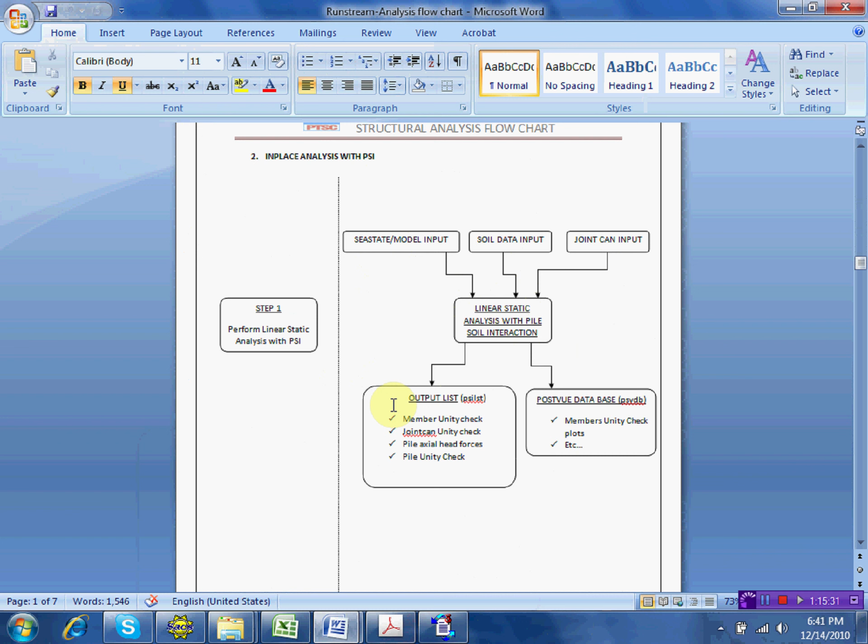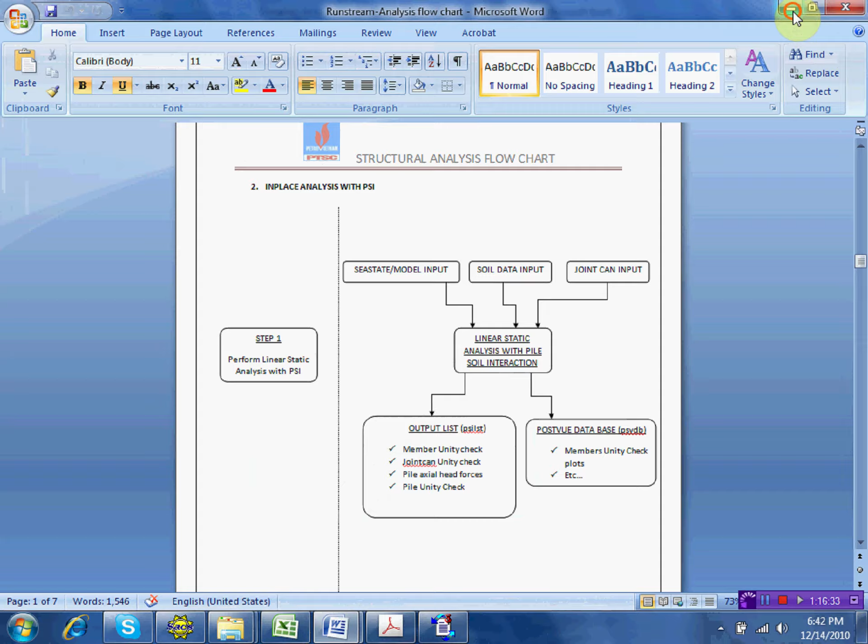Okay, so proceed. 408A, point 1, 409A, point 1, 410, 411A, point 2, point 1, point 23.

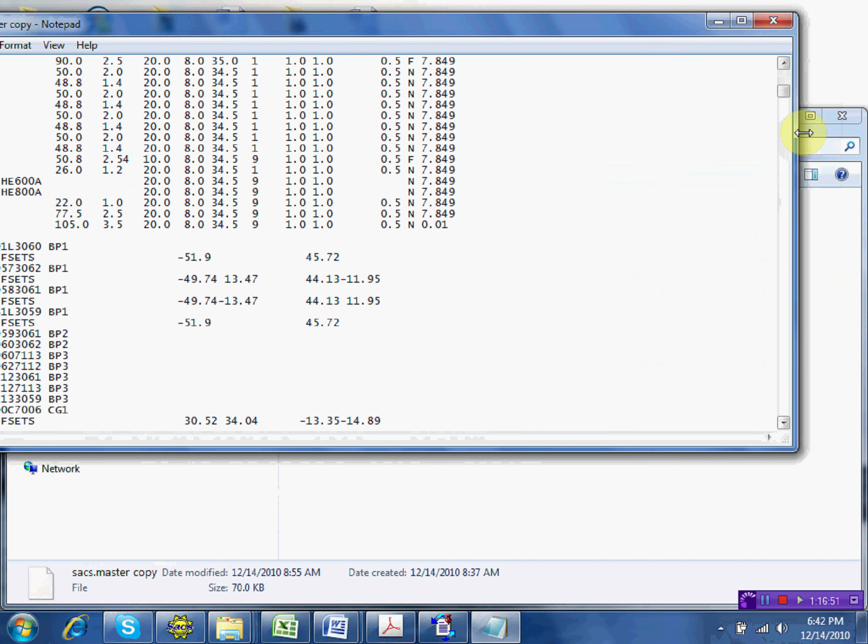I have already made this file here, but you have to update this one, point 23 and point 1. I will just send this file, the procedure is the same, you got the procedure already. Just copy the wave and make another load condition, and then on the load combination, you put the factor which is coming from this point 23 and point 1.

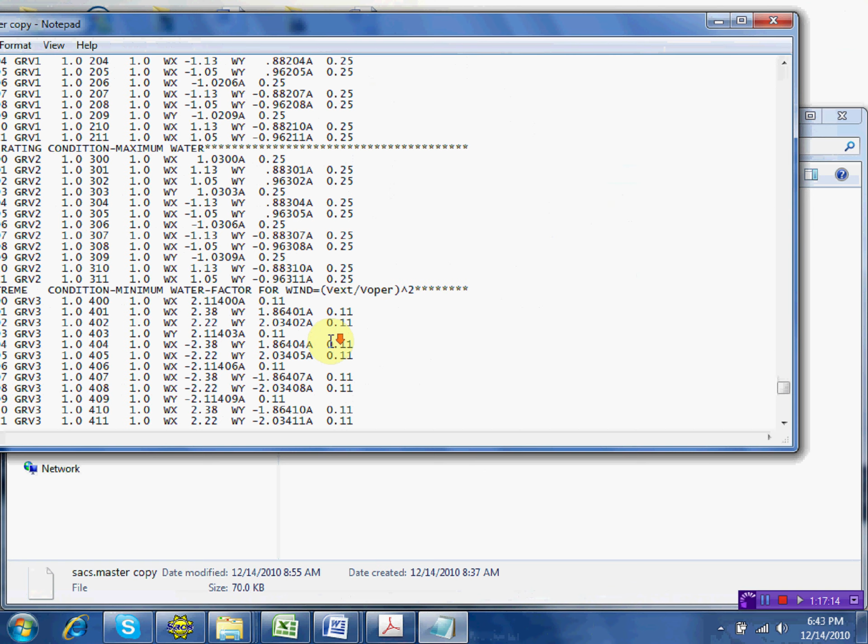Operating this one. This, the first one is operating, the second one is extreme.

Joint can also. Okay.

But take note, you have to change the factor, because it's different, because I changed the weight of the conductor. So change that to point 23 and point 1. You change, you update 0.23 because I think that one is 0.25. It's different because I changed the weight of the conductor.

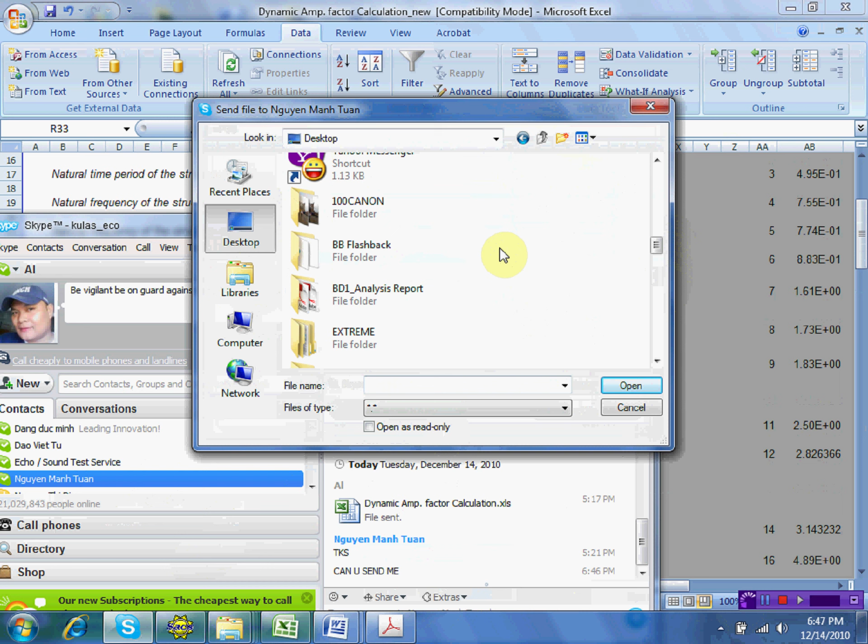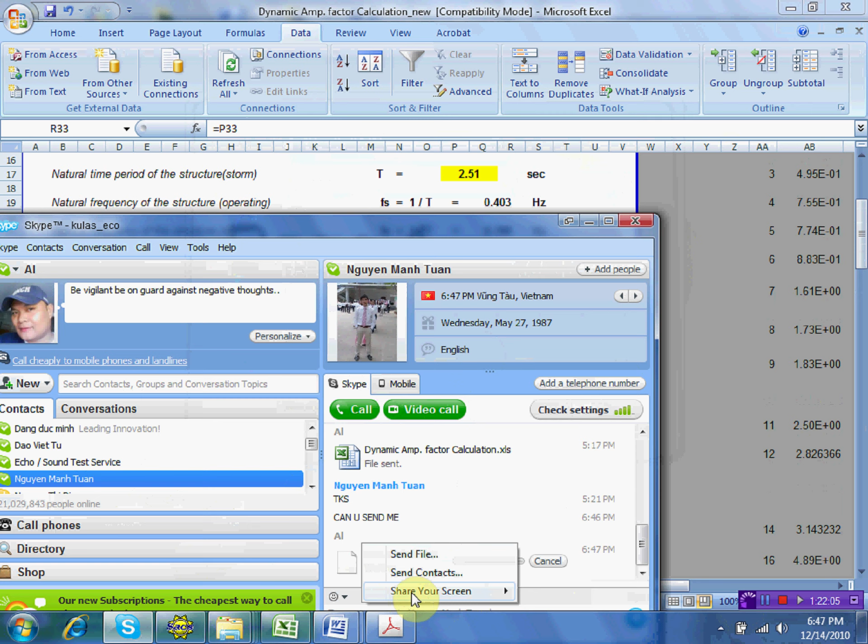No, we already changed that one. We already changed that one, right? I think it's the best way to copy the whole folder. And then you distribute, huh? Yes, the whole folder.